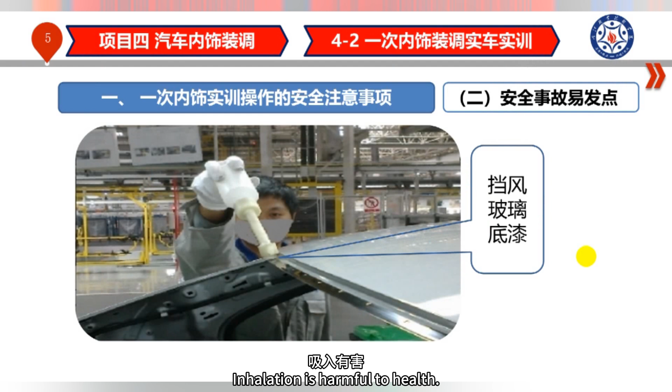During the training, strictly follow the assembly specifications. Wear personal protective equipment properly. Maintain a high level of safety awareness. Develop proper 7S workstation habits and work discipline. In the interior assembly section, the windshield primer is highly irritating. Inhalation is harmful to health. Personal protective equipment must be worn before operation. Enhance self-protection awareness. Any unsafe behavior should be advised against and stopped immediately.

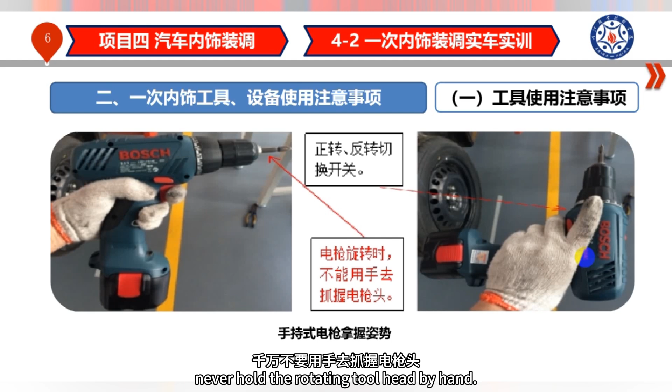Electric nutrunners are frequently used during assembly. When the electric nutrunner is in operation, never hold the rotating tool head by hand. When using a handheld glass suction cup, ensure that both the glass and suction cup surfaces are free of debris or foreign matter. Lock the suction mechanism immediately after attachment. Push and pull twice before transfer to confirm secure attachment, then transfer it to the installation workstation.

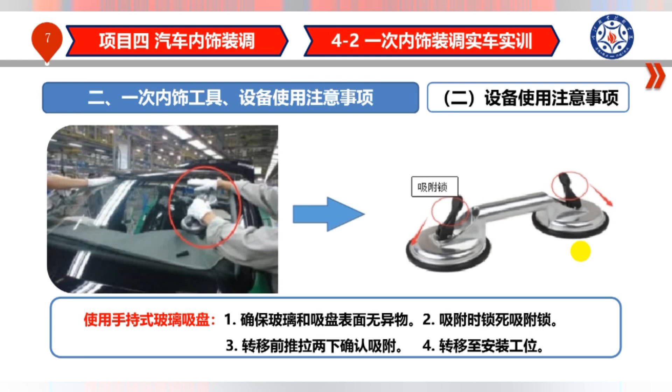The quality control points for primary interior assembly include the following. First, application of windshield primer. Clean the sheet metal frame edges before applying primer. Ensure the primer width is 14 plus or minus 2 mm. The primer must closely follow the windshield edge. If primer contaminates the automobile body, remove it immediately with isopropyl alcohol. Ensure continuous primer application. This prevents water leakage around the windshield.

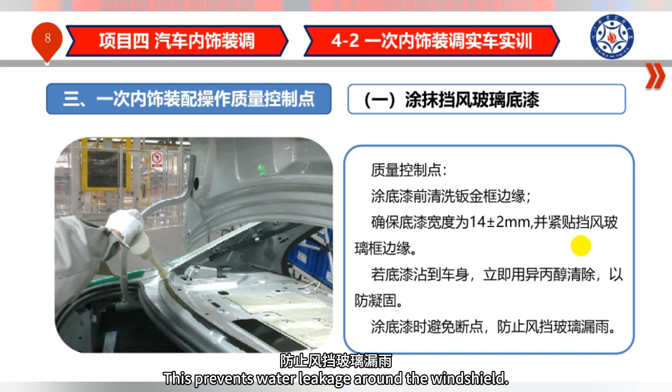Second, installation of the body wiring harness. The body wiring harness installation should cover the entire automobile body. It is mainly secured with clips. Incorrect installation will cause rework and damage to the clips, resulting in wasted time and components. Therefore, part information must be checked before installation. Only proceed with assembly after confirmation. For operational demonstrations, please watch the video on Shishitong, primary interior trunk auxiliary harness.

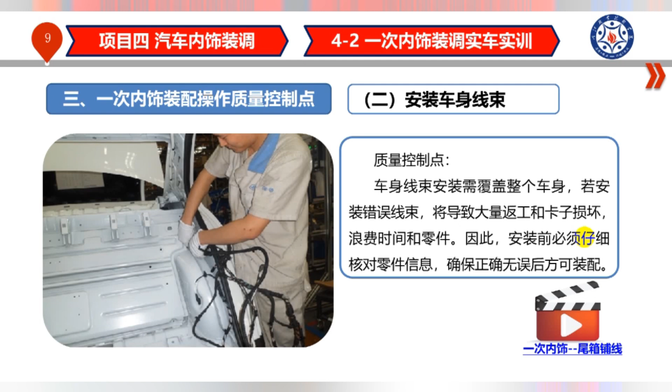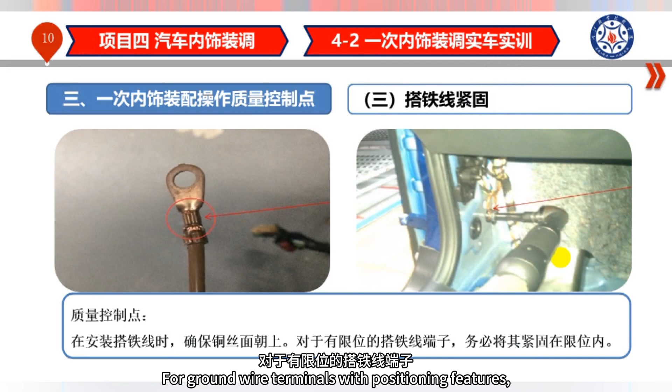Third, ground wire tightening. When installing the ground wire, ensure the copper conductor faces upward. For ground wire terminals with positioning features, secure them in the specified position. Fourth, installation of the ABS control unit. Moisture entering the braking system will reduce braking performance. In severe cases, it may cause brake failure. Therefore, before installing the brake pipes, do not remove the sealing plugs from the ABS control unit ports.

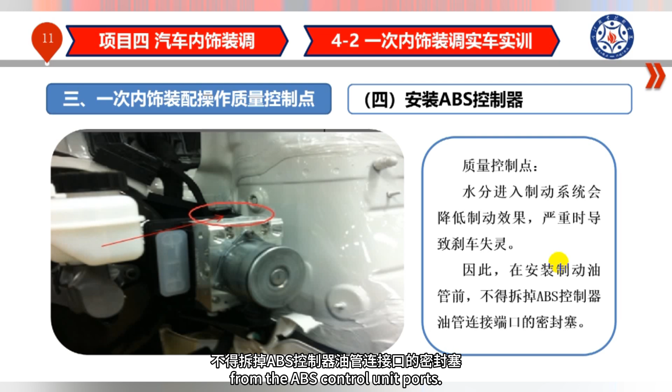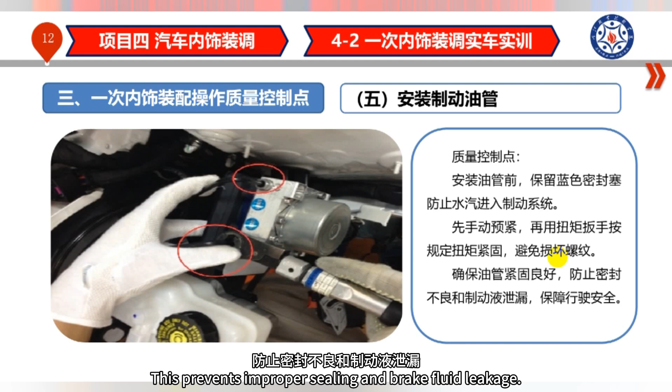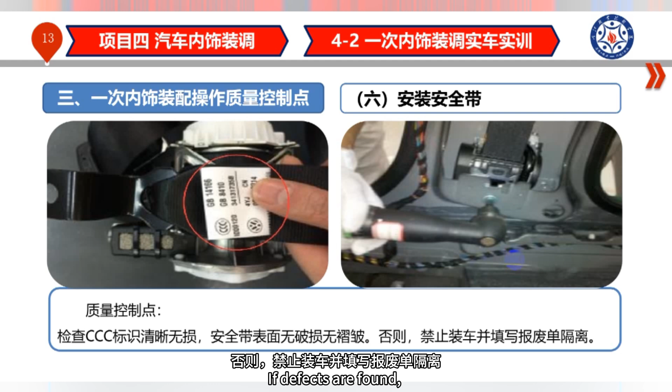Fifth, installation of brake pipes. Before installation, ensure the blue sealing plugs are in place to prevent moisture ingress. First, tighten by hand. Then tighten to the specified torque. Ensure the brake pipes are securely fastened. This prevents improper sealing and brake fluid leakage. This ensures driving safety. Sixth, installation of seat belts. Check that the CCC mark is clear and undamaged. Ensure the seat belt has no damage or wrinkles. If defects are found, complete the scrapping form and isolate the part.

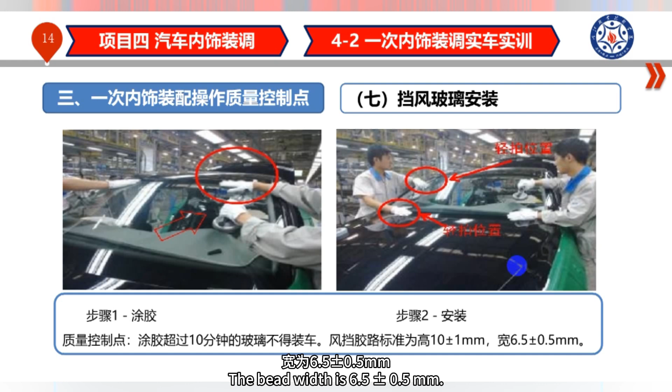Seventh, windshield installation. Steps 1 and 2. If adhesive application exceeds 10 minutes, the windshield must not be installed on the automobile. The standard windshield adhesive bead height is 10 plus or minus 1 mm. The bead width is 6.5 plus or minus 0.5 mm. Steps 3 and 4. When installing the spacers, ensure they are firmly attached to the windshield. Keep a distance of 5 to 10 cm from the side edge.

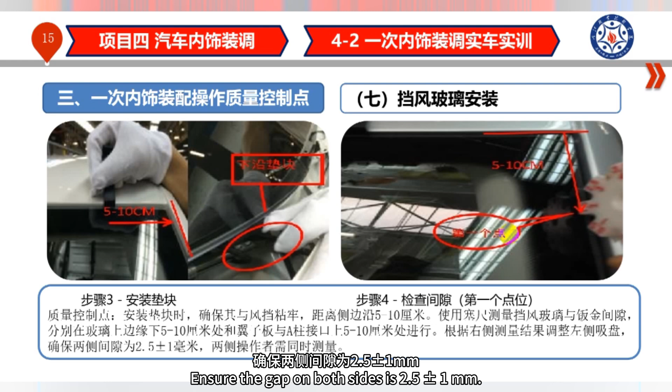Use the measuring gauge to measure the gap between the windshield and the sheet metal. Perform the measurement at 5 to 10 centimeters below the upper edge of the glass and at 5 to 10 centimeters from the junction of the fender and the A-pillar. Adjust the left suction cup according to the measurement results on the right side. Ensure the gap on both sides is 2.5 plus or minus 1 millimeter. Operators on both sides should measure simultaneously. Step 5. Apply discontinuous adhesive tape. Maintain a spacing of 30-40 centimeters. After waiting 120 minutes, remove the front windshield spacers. For other key steps, please refer to Xuexitong for self-study.